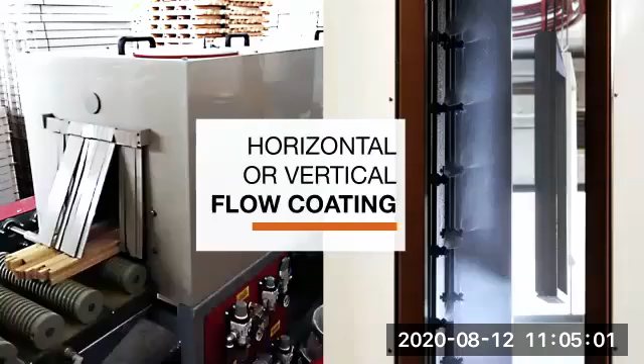All right, so let's start with the available technologies at JSA Machinerie. First of all, we have the flow coating technology, which could be either horizontal or vertical. These are specialty technologies for wood treatment.

You could be working with furniture, windows, doors, or any wood structures. Flow coating is basically a treatment shower of the product that you're going to put on your wood surface. It's a very minimal technology where there are no parameters such as thickness of product or the amount of product that you're going to be putting on your material. It's really just passing your parts through a shower.

I'm not going to address too much of this technology today, as we want to cut to more of the robot lines, but just know that these are technologies we have available for you.

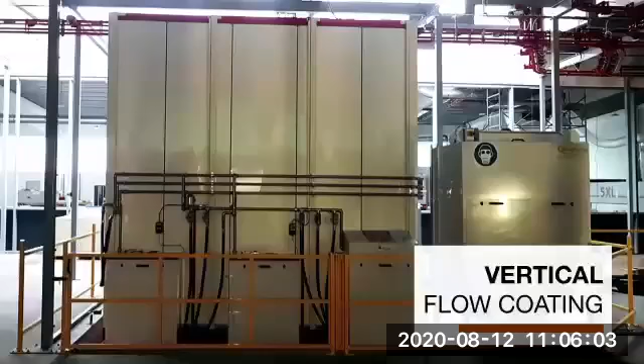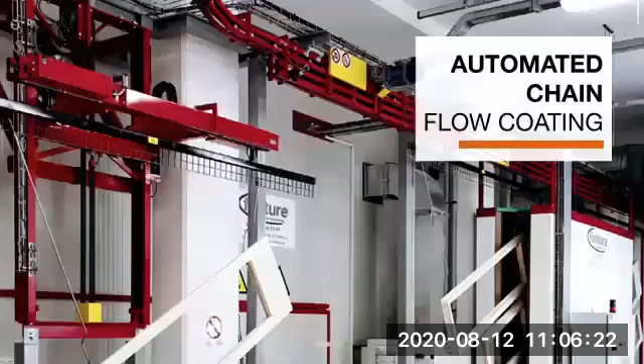The main difference between horizontal and vertical is that a vertical system is one that can be automated - we're able to put those parts on a chain of production. If you're looking at a horizontal system, you're going to be looking at more of a manual entry, manual exit of your parts. So really no automation solutions there, other than the part being painted by itself as it's being trained into the machine.

The second solution that exists we would call the Cartesian robot. It is not yet what we see as a robot, like the arm moving around. It really is more of a robot that's built on a Z-axis, making movement up and down.

So you have a nozzle of paint this time, not like the flow coating where it's more of a product used for wood. This is more addressed for painting, but it's not as accurate as either a human or a 6-axis robot.

These technologies would be used more for primer coating of doors, or primer coating of any wood structures, if you're thinking about prefab walls and things like that. Again, not going to go so much deeper into that.

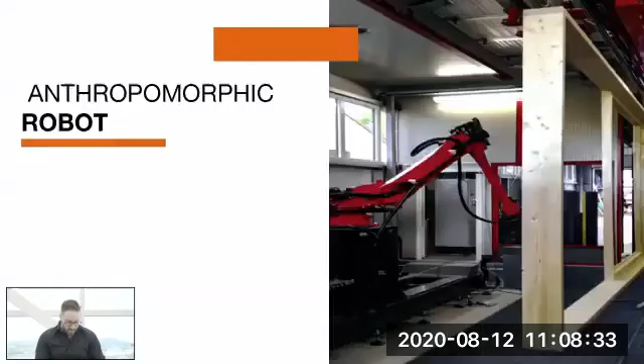Now let's move to the anthropomorphic robots - much easier to say 6-axis robots. So I'm going to use the term 6-axis for the rest of it.

6-axis robots is really what you're thinking of when you're thinking about an industrial robot - really the arm that moves around and recreates human work. Very flexible and agile. And what we're going to be looking at is really a level of repetition of your work - very uniform work. What you see day one is what you're going to see 5 years down the line. It's always going to be the same quality that you're driving out of your robot.

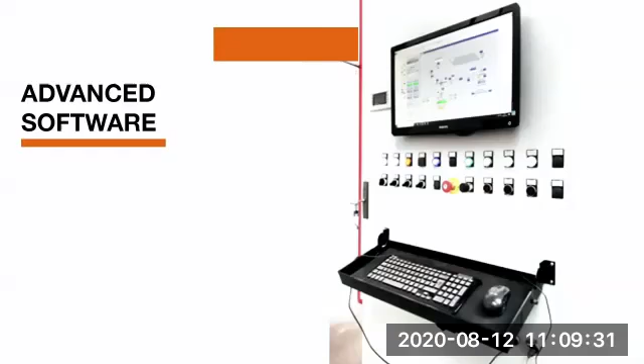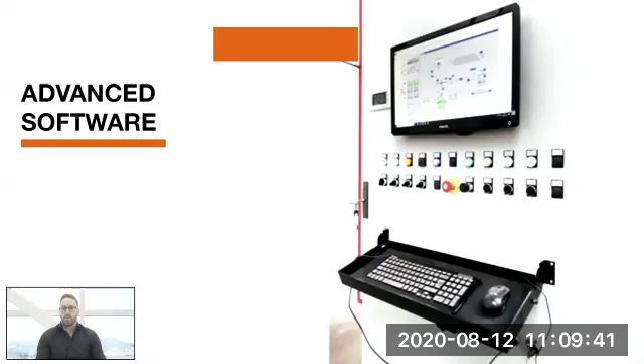Now, the most important part of the technology is not the robot itself. It's really all driven by the software behind the robot. This is where the company we distribute, Finisher, has put all their effort into creating the best software out there to help you with your work.

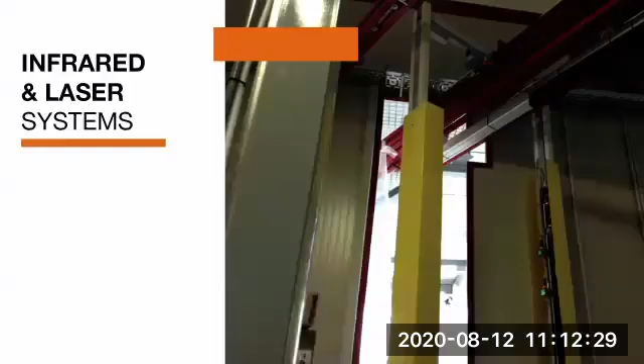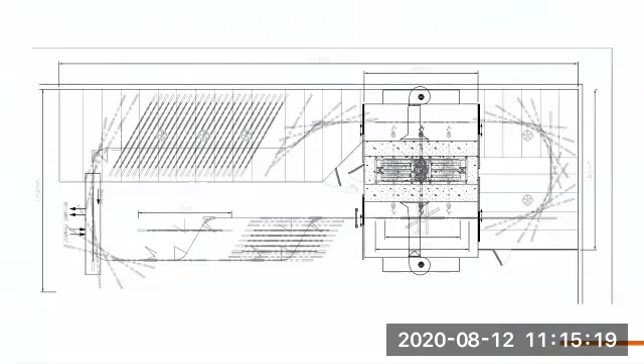Next part is going to be the drying area. Are you working with ambient air? Are you working with oven? Are you working with infrared? All technologies that are available. I don't believe there's any good or bad solutions there. It really depends on the product you're painting, the paint you're using, and how fast you want the parts to be out of the system. So it's all topics that could be addressed, but just know that all the technologies are available to put in there. It's just a common paint booth like all the other ones at this point.

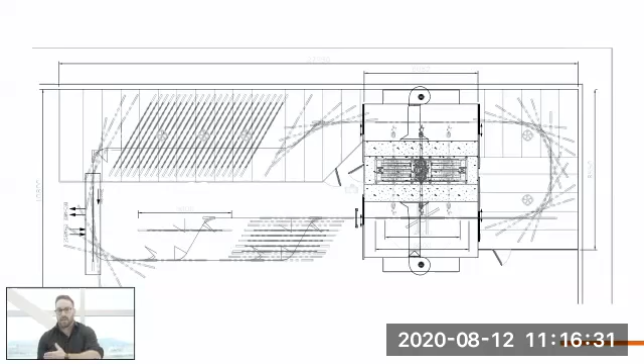I want to bring your attention to the top, middle of the screen now. You're gonna see that the parts are shifting sideways. Again, we're using a double rail, but this time instead of changing speed, it's just the parts moving sideways. So you can see that the buffer zone, the resting area, can have a lot more parts than if they were just one behind the other on a single rail.

So again, not a huge technology, but it's something that really gains a lot of space in your factory. I've said it before, those layouts can be adapted to all of your needs. There is not a one solution fits all. We really go to your factory, see what you have to do, see how you're doing things, and then draw a layout from there. This one is just an easy example of what can be done.

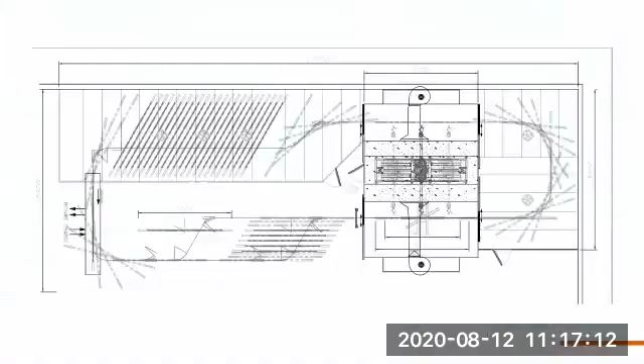Important part: if you are using many different colors, like pretty much every company out there, you probably have black as your biggest color, but once in a while you have to paint some windows green or pink for any reason. Know that the robot has a solution of cleaning itself in between every single rack that comes into the paint zone. So even though you'd be painting black all day, the nozzle would be cleaned after every rack of windows that comes in front of it, so we don't have any dust or anything that builds up on the end of the nozzle and causes some bad work to be done on it. So just a short video of how it's done.

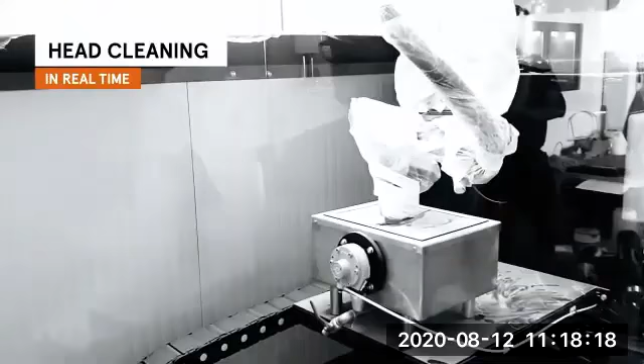You're seeing here that the robot is painting, making its way around the window, and then it's going to be cleaned. What you don't see there is the parts are actually moving out of the paint booth, and the next windows are coming in at the same time. So it's really working in the downtime. It's not adding any time, any manufacturing time, to your process.

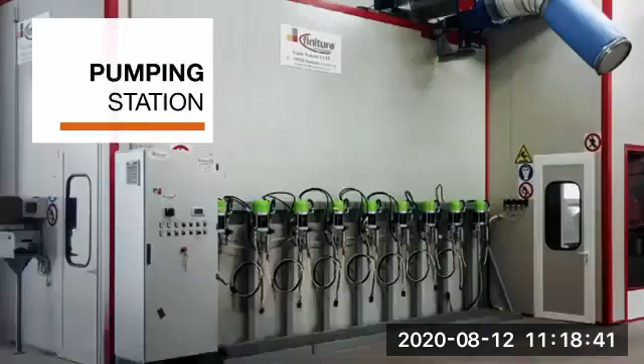Another thing is pump stations. You can see on this picture here many different pumps. Usually what we try to do with customers is address the biggest sellers, the colors. So again, if I'm thinking about Canada, you're probably going to have one pump that's going to be black, maybe one pump that's going to be commercial brown, and then you're going to be looking at a custom color pump.

What we try to do is have two different pumps for the custom colors, so you're not rushing to change your color every single time there's a new color. If you have two of them, you can switch in between them. And you're going to have a last pump that's going to be the water pump, where it just helps you drain the color as you're switching colors.

Keep in mind, if you want 20 pumps for 20 different colors, it's just a matter of knowing when we start the project how many pumps you want. There's no right or wrong answer towards that. But the only thing with pumps that we're going to be telling you is the size of pumps that you should buy. But again, we're not the pump sellers. You work with the company you're used to working with. We're just going to be addressing the size of them to make sure the robot doesn't miss paint during the work.

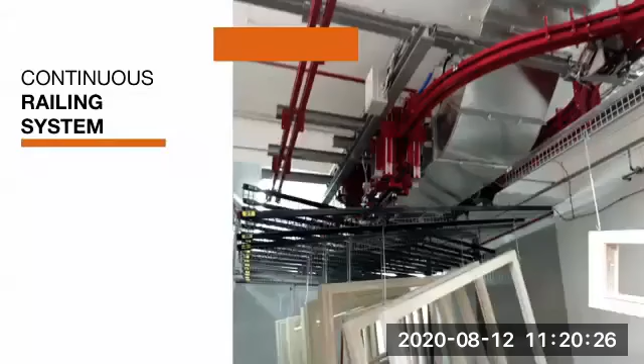All right, so capacity and limits.

Very important details that need to be addressed when we're building a quote for you is the temperature. Is it hot, is it cold, is it humid, or is it dry in your factory? Obviously in Canada, one day is hot, one day is cold, we have all those different temperatures. So there are things like air conditioning or machines that play with the humidity level in your factory, especially in the paint booth itself. Those are things we're going to address with you to make sure we give the paint all the chances it can have to dry at the good pace indicated by the paint company.

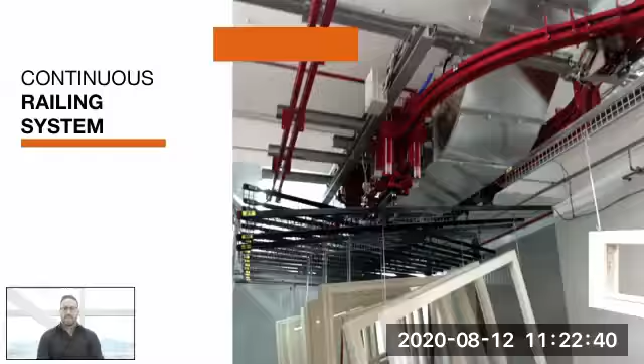I talked about racks before. You can see on this picture right now the racks. Those racks could be 2 meters, 2.5 meters, 3 meters, 3.5, and 4 meters wide. There is no limit to how many parts you can put on one rack. The best example I can give you would be painting one window that's one frame and two sashes. Obviously it's going to be the same color, so you're able to fit all three parts on the same rack. The only thing you need to look at is making sure you have enough space in between all parts for the robot to be able to do its work, so that if you're painting on the side of it, you overflow all the contour of your window.

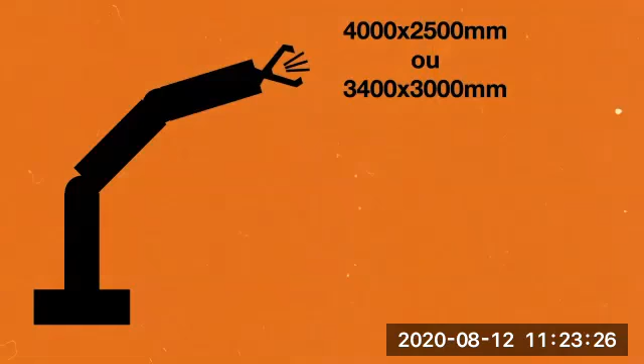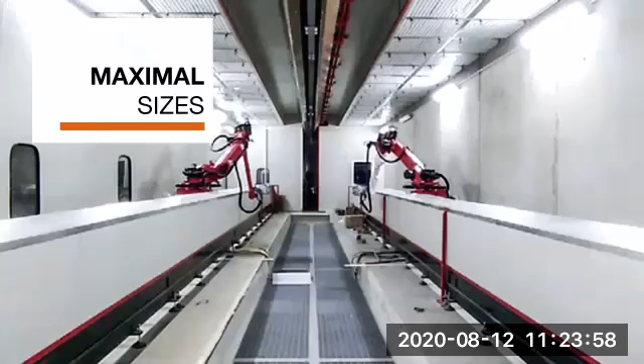Next is the capacity of the robots. There are 3 available robots that we work with. The first one is the small one, it's 3 meters by 2.8 meters. We haven't sold any systems with that because windows are tending to be bigger and bigger right now. If you're looking into a much larger capacity, there's another robot with a capacity of 4 meters by 2.5 meters, or we can change to the same robot having 3.4 by 3 meters capacity. If you think this is not enough, just know the robot can always be installed on a 7th axis. As you can see on this picture, this exact project was done in Europe, it's a 20 meter long rail, so there's really no limit to the size you can have for that 7th axis. This was done for a company that builds pre-built walls, just to give you an example of what can be done.

All right, now the most important part, how to evaluate your needs.

The biggest question I get every single time I go to a customer who wants to automate his paint booth is, can I add a robot in my existing room? The answer is not that easy, I'm not going to say no, but I'm not going to say yes. So here are the things you need to address if you want to keep your existing booth. First of all, the part needs to be capable of moving, so going back to the layout, it goes through a scanner that measures the part. If your painting booth does not have a chain, it doesn't make any sense for the way our system works. Second thing, that scanner needs room. So if your paint booth has a chain but there's no room to install the scanner, we're going to be facing a problem, because this part needs to be measured in the scanner.

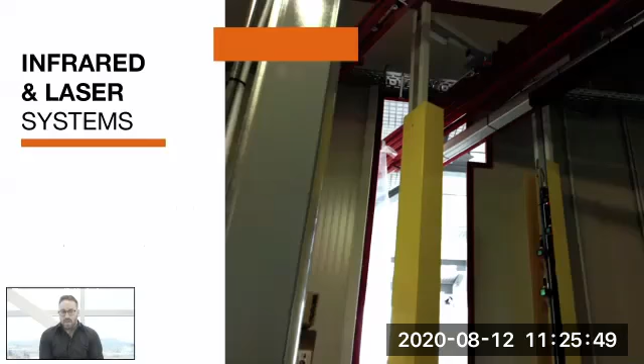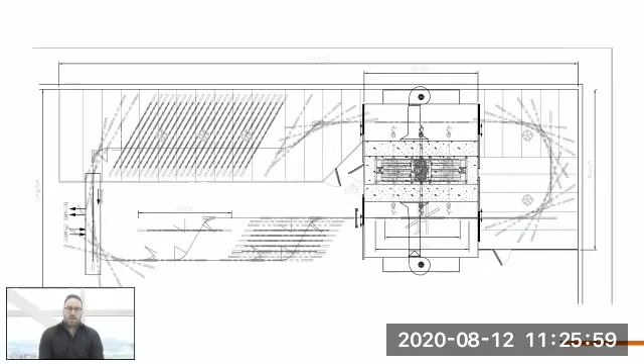Third thing, going back to the layout: monorail. Most of the chains that exist right now on the market are on a monorail system. So first of all, you're not going to be able to do the dual speed I talked about in front of the robot. Let's say you're stopping your part in front of the robot, and the rest of the line is going to be stopped.

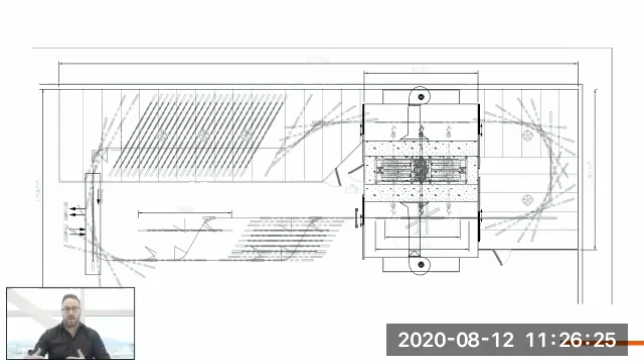The second thing is the resting area, where you're not moving or shifting windows sideways to accumulate them, then you're going to be facing a problem in space. But again, that's not a no-go for the robot itself. It's just to keep in mind that the robot is not going to be optimized if we're always slowing down the chain. The part must be as stable as possible.

So a good system of hooks would be needed in place.

So if I'm going through the scanner this way, and as I'm moving, the part shifts this way, well, it's not going to be painted because the robot waits for it this way. So you need a system that's going to hold the part throughout the whole system the same way you've put it on. After that, maximum sizes.

Just keep in mind that the robot needs 600 millimeters on the ground below the part to be able to do its work efficiently.

Most of the rail systems I've seen are much lower, so the parts are really moving very close to the ground, and it's usually the painter that bends his knees and goes under it. Well, the robot doesn't have any knees, so it's not going to be able to go there for you.

And keep in mind that you have the rack, you have the rail system, and your biggest window, so it gives you quite an important height to be respected.

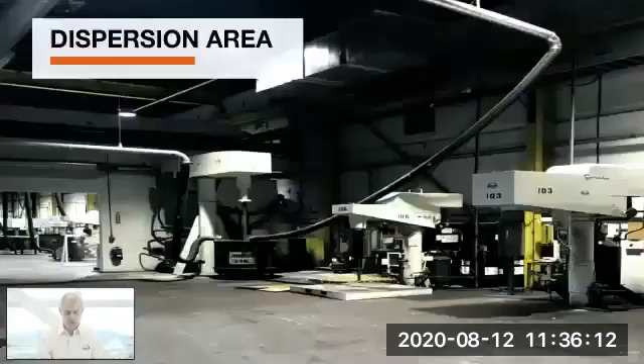In the raw material division, we are handling two types of raw material: powder form as well as liquid forms. When we mix those two products, we generate a paste, which is then being processed at the dispersion area.

On this slide, you can see different dispersers that we have in our manufacturing plant. The disperser we utilize varies from the size of the vessel that we use for mixing our paste. So we have mixing vessels that have a capacity of 60 gallons to 600 gallons per batch. On this slide, for instance, we're showing the 600-gallon disperser that we're using.

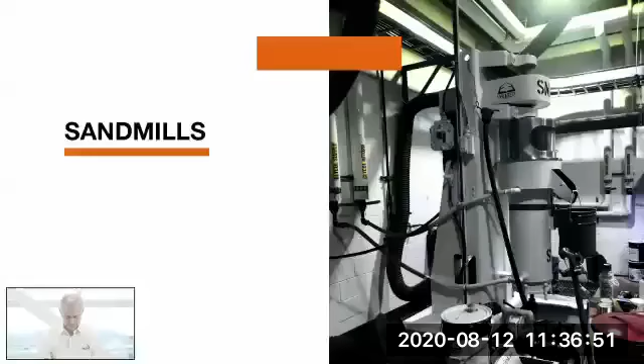After having the paste dispersed, it goes to the sand mill area. The sand mill per se, on this slide you could see, is like a column. And in that column, we have grinding media where we force pump the paste from the bottom to the top, so that we can generate a homogeneous paste, homogeneous color in terms of pigment, as well as making sure that the pigment size is properly ground so that it won't block any spray equipment.

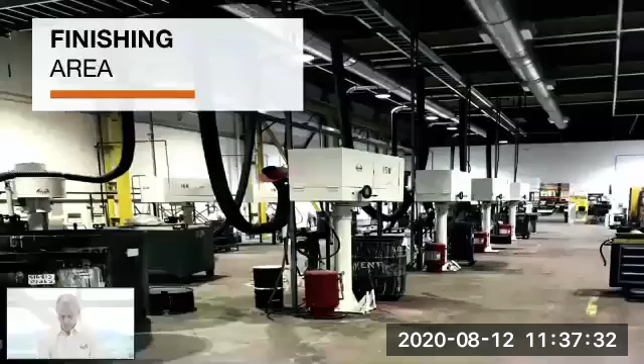When the grind size is finally obtained and QC'd, we go to the finishing area where we're adding the rest of the raw material to adjust the viscosity, adjust the color, and make sure that it meets the customer criteria.

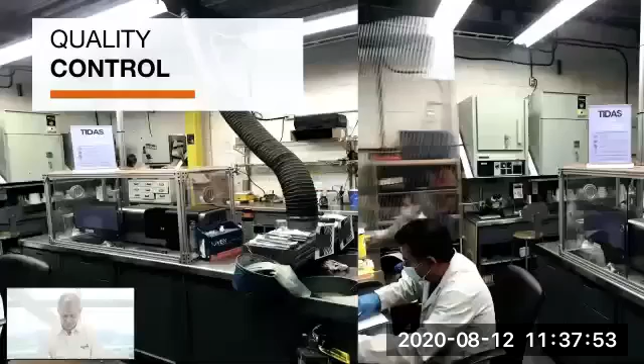Without the quality control department, this won't be possible to be done. On this slide, on the left side, you'll see a piece of equipment that we're using to analyze the grind, but we're using different pieces of equipment to characterize the product so that it meets customer needs.

One test that we're doing, obviously, is color verification, and we're using the LAB system. So for those of you that don't know too much about the LAB system, it's a universal system that we utilize to numerically characterize the color.

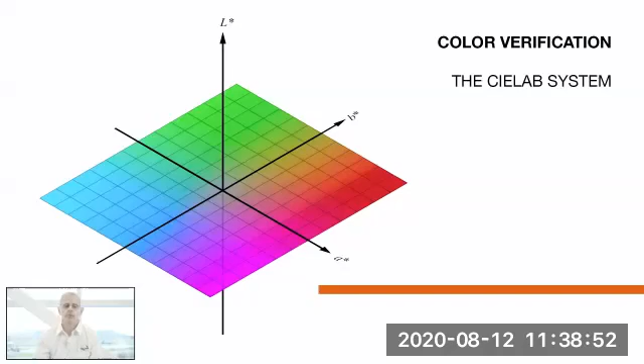Then, when we have the color numerically in our system, we could compare it to a standard. In a lot of documentation that you will see, we're talking about delta E measurements.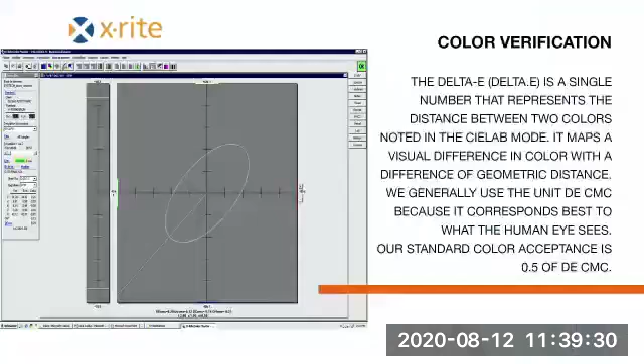In our case, we're using a little cousin of the delta E characterization, which is called DE CMC, because DE CMC is more appropriate to define the color, as it's closer to what the human eye can see. And in our laboratory, we accept a color variation of 0.5 on DE CMC.

In a lot of literature, specifically with AAMA, you will read that certain tests require that the delta E should not be more than 5 in terms of color variation. I wanted to show you on this slide what delta E of 5 corresponds to for the same shade, obviously, of green.

Then we also test heat buildup. What is heat buildup? Basically, it's a way of measuring or predicting how your PVC extrusion will react to sun exposure. The heat buildup test is based on ASTM D4803, and it compares the reaction of your PVC extrusion with your paint compared to a black control sample.

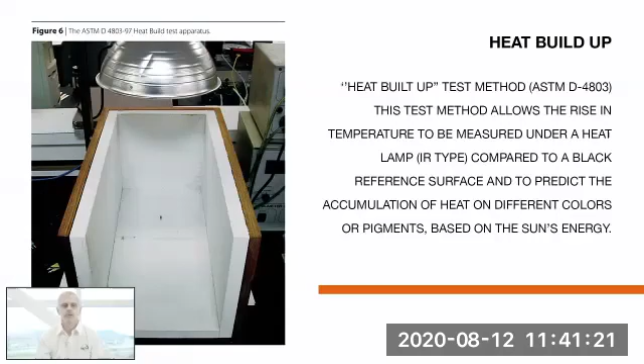The apparatus you have here is an open box with isolated styrofoam. On the floor of that box, you have a temperature probe where you're going to be placing your PVC sample, and that sample will be submitted to an IR lamp on top. Normally, the test is done under a 30-minute exposure of the IR lamp, and you measure the temperature at that time.

On the next slide, the delta T obtained from the ambient temperature and the exposure after 30 minutes has been computed using the 11.2 equation shown on that slide. Basically, if you were to use the black control sample, you would end up with a measurement of 41 degrees Celsius for a vertical exposure and 50 degrees Celsius for a horizontal exposure.

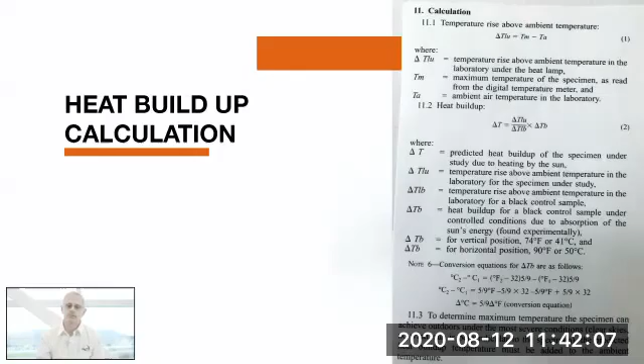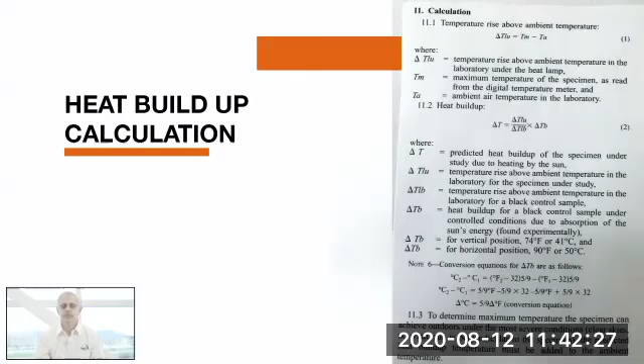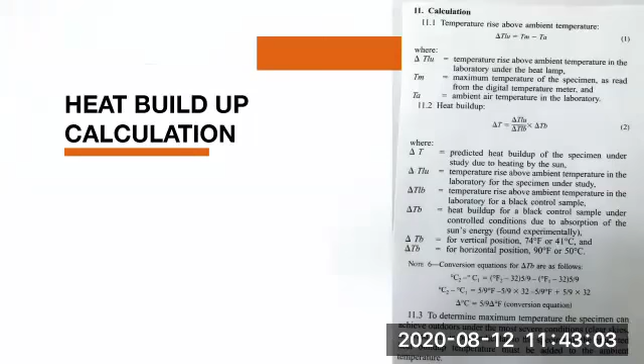In our case, the quality control maximum temperature we're accepting is 32 degrees Celsius. So what does that mean? It means that if you utilize a product or paint on your PVC extrusion, and you have a delta T of, let's say, 40 degrees Celsius, and you're at a 30 degree Celsius ambient temperature, that means your PVC extrusion needs to withstand 70 degrees Celsius exposure. In our trade, most of the PVC on the market right now will be able to withstand temperatures around 60 to 65 degrees.

The next slide shows an example of heat buildup measurement we could get if we compare a white PVC at the top of the table on a horizontal position. You're going to get 24.9 degrees Celsius, whereas if you go to black, which is at the bottom of that table, you'll end up at 25.7 degrees Celsius.

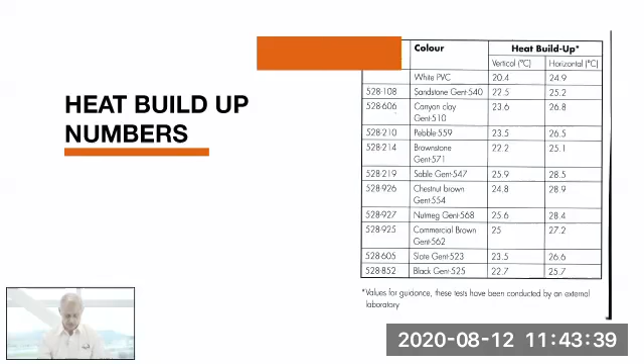We do that for all the colors as well as all the bases that will be used to make any shades of colors. Then when all the tests are done, it goes to the packaging area, ready to be shipped to the customers.

On top of that, as we said earlier, customers are asking for a lot of just-in-time custom colors. So by using our service center and the colorimetry system, using a spectrophotometer, we could generate just-in-time custom colors.

Paint requirements. Well, as I said, I split the topics in two. First of all, let's talk about AAMA standards. The AAMA standards have been split by substrate, so we have standards for PVC, fiberglass, and aluminum. They most likely look alike each other, except obviously the substrate differs.

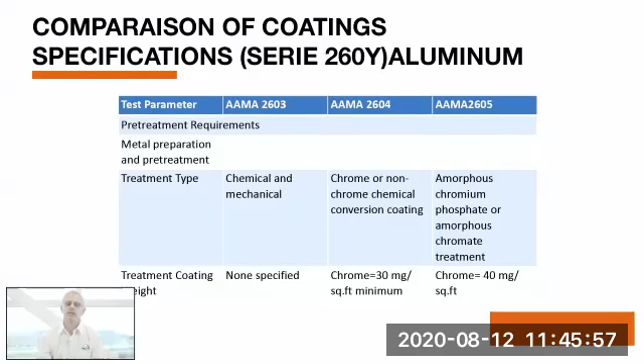So we'll be talking today just on the 2600 series because it will be almost the same for all the substrates. I prepared a table to show you the differences in terms of requirements depending on whether you're looking at 2603, 04, or 05 standards. For surface prep requirements, you could see that the AAMA standards are a little bit, I'd say, not so precise for 2603, whereas 2604 and 2605 are requesting a proper amount of chromate to be deposited on the substrate prior to the application of the paint.

Paint film requirements vary from a minimum of 20 microns to 30 microns, depending on the standards that you're looking for.

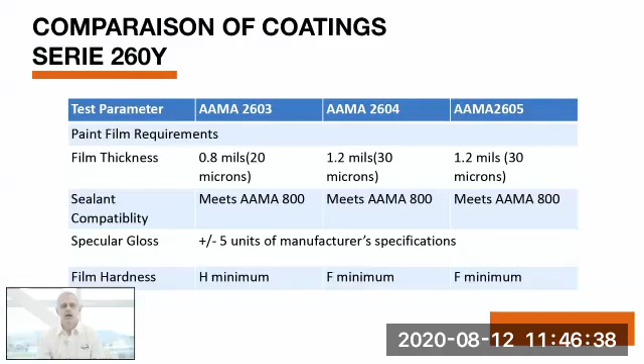If you look at film hardness, strangely the different standards are asking for a harder film, which is H minimum for 2603, against 2604 and 2605, which are requiring an F minimum, a softer hardness of film than 2603.

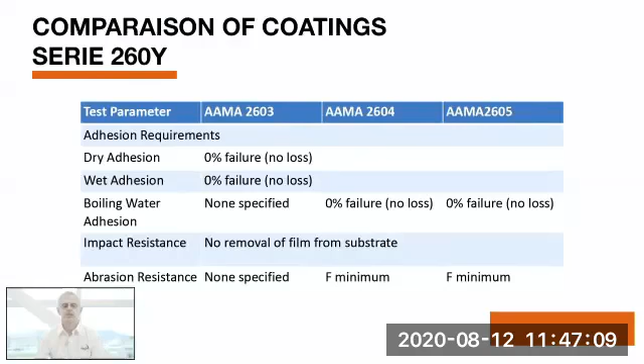On adhesion requirements, mainly all three standards are almost alike. They're asking for no failure on dry and wet adhesion, as well as impact resistance. It differs a bit on 2604 and 2605 for boiling water and abrasion resistance, which are a little bit more stringent requirements for 04 and 05 for AAMA.

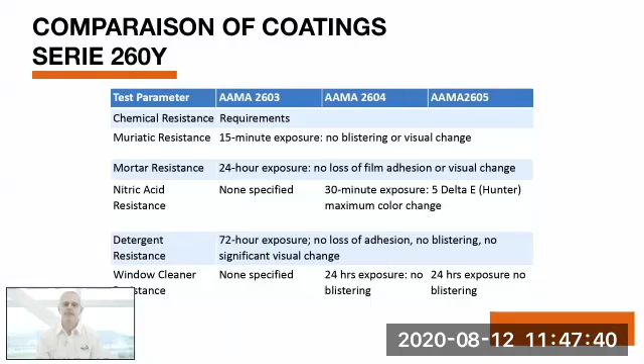Chemical requirements: again, all three standards are asking for the same thing for resistance against muriatic acid or mortar resistance. It varies a bit for nitric acid because only 2604 and 05 are requesting resistance to nitric acid, with a delta E of maximum 5 after 30 minutes of exposure.

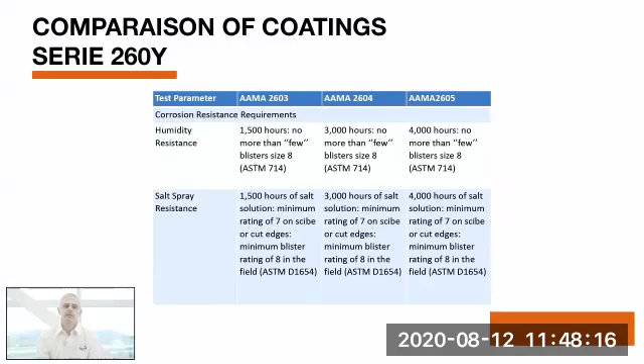Humidity and salt spray resistance - this is probably where we could see the differences between 2603, 04, and 05. In these cases, the tests require 1,500 hours to 4,000 hours of exposure, depending on the standard, whether it be under the humidity chamber or the salt spray cabinets.

On weathering, there's only an accelerated test exposure for 2603, and where it really differs is the outdoor exposure, where a 1-year exposure in South Florida is requested for 2603, and 04 and 05 are respectively at 5 years and 10 years, with a maximum delta E of 5 again, and also some requirements in terms of gloss retention.

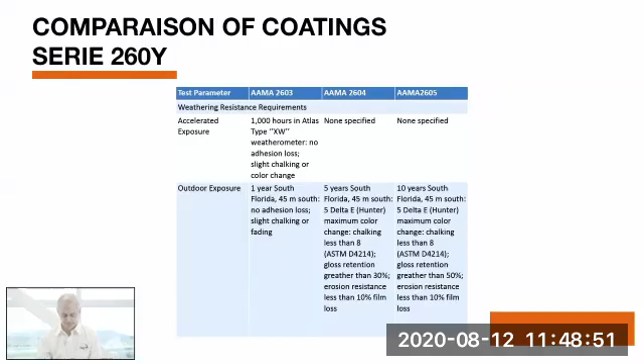For polypropylene, it's a little bit more complex. We have to first clean up the surface with acetone, then use an adhesion promoter like our 360-051 with a very fine mist coat, then let it flash off before application of the top coat.

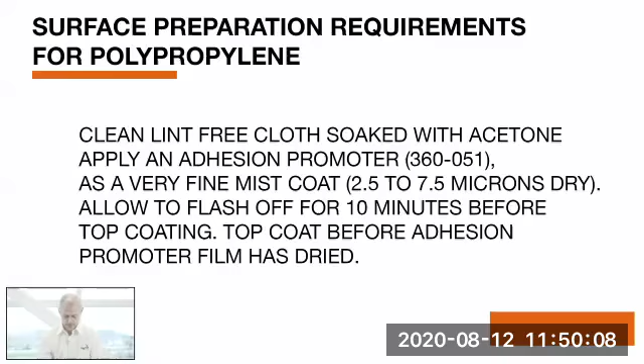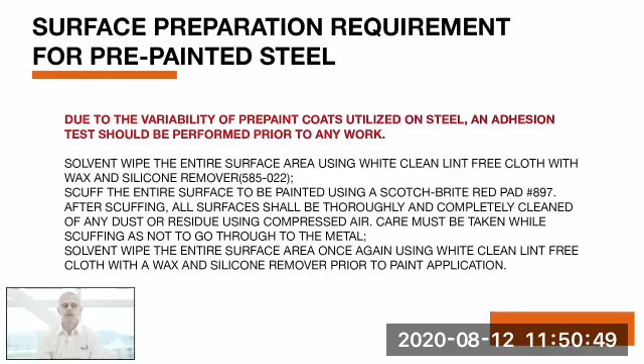For pre-painted steel or any pre-painted metal surface, I've put a warning on this slide because it's very important that first you check the compatibility of the pre-paint coat against the top coat prior to doing any big work, because some pre-painted coatings are not compatible with your top coat. Once checked, the process is to clean up the surface, scuff the surface, and make sure you don't remove all the pre-paint coat from the surface. Otherwise, you're going to have to reprime the surface prior to application of the top coat. After scuffing, clean again and top coat.

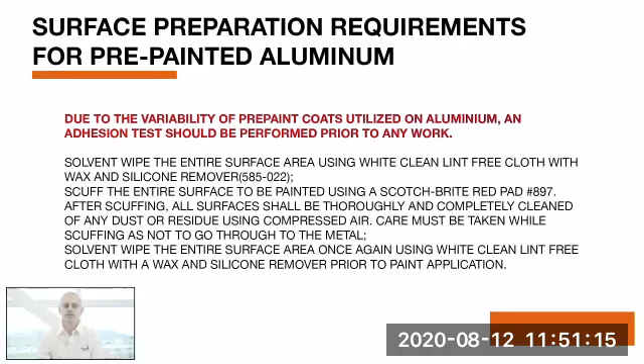On pre-painted aluminum, same remarks as before: make sure you have good compatibility of your pre-paint coat against the top coat. Clean up the surface, scuff the surface, make sure again that you don't remove all the pre-paint coating before application of your top coat, and then top coat the surface.

On bare aluminum, it's a little bit more complex. You have to first sand the surface and clean that surface before application of a vinyl wash primer, such as our 360-535. You have to apply a mist coat of that product, allow it to dry a bit, but the application of the top coat should be done between 5 minutes to 4 hours after application of the vinyl wash primer. Otherwise, you're going to have to start the surface prep process again.

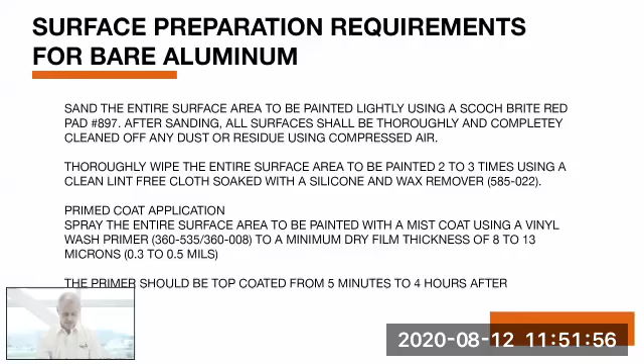Fiberglass, very easy. You've got to clean the surface, scuff the surface, make sure you also remove any type of water repellent that could have been applied by the manufacturer, especially ones shipping products from abroad, because these products are used to avoid fiberglass warping. So you have to remove that before top coating the surface.

As mentioned earlier, we have two systems: ACRYTHANE AQUA SERIE 528, our water-based system, and ACRYTHANE 3000 SERIE 592, our solvent-based system. Both systems have excellent adhesion to PVC, fiberglass, pre-painted steel, or aluminum, and they come in 29 standard Gentek colors. We also have a system for staining, and ACRYTHANE AQUA. Both systems have low heat buildup characteristics and a proven track record of 20 years.

About manufacturing trends, there are trends for manufacturing and trends for the final customer. These are two different ways of looking at trends. On the manufacturing side, obviously the most important thing is to improve productivity. If we talk about paint installation, we have three steps: surface preparation, paint application, and line drying.